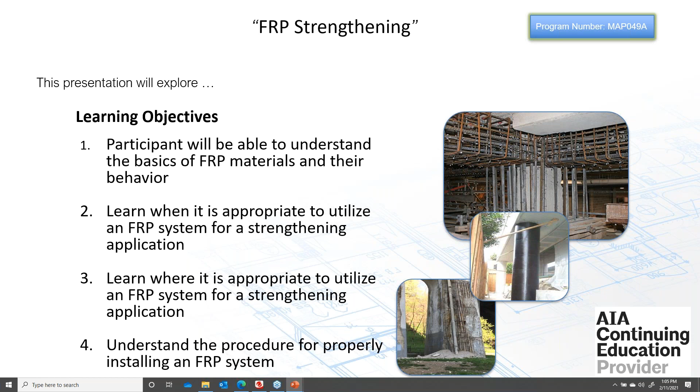Then we'll learn where it's appropriate to use these systems, as in flexural strengthening of beams, walls, etc. We'll kind of go through the different applications. And then Hamza will come on and walk you through some of the installation issues, quality control, things like that. So with that, I will jump right into it.

So really, when we're talking about FRP, we're talking about strengthening typically. Sometimes we use it for protection, but mainly we're talking about strengthening of existing structures. There are really four main reasons why we would be looking to strengthen a structure. The first is simply looking to increase the load-bearing capacity of that structure. So that could be due to a change in use.

So maybe you have an old warehouse that's being turned into apartments, and you need to increase the live load ratings for the floor. Or maybe you have an existing office building and they want to, say it's a law office, put in a library of books. So then you have that big heavy load that you need to account for. So you might have those new load conditions.

And then of course you could have design or construction errors. So either the engineer possibly under designed, which certainly happens from time to time, or there was a construction error. The bars were supposed to be at, say, 12 inches on center, or 25 centimeters on center.

The second reason, and certainly the biggest, is damage or deterioration. That covers a lot of different things, but mainly we're talking about corrosion. Corrosion is detrimental to the strength of the reinforcing steel as it corrodes and loses section area. You lose flexural capacity or shear capacity, whatever application you're dealing with. So we need to get in and replace that strength that's been lost. This is probably one of the more common reasons we'd be using FRP.

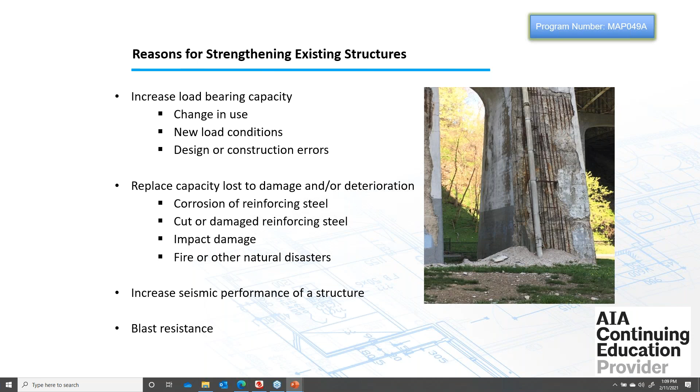The last one there, blast resistance, doesn't come up super often, but it's obviously a very specialized kind of engineering application. FRP materials are very effective to increase the blast resistance of structures, and certainly can be used if you have an application that would require it.

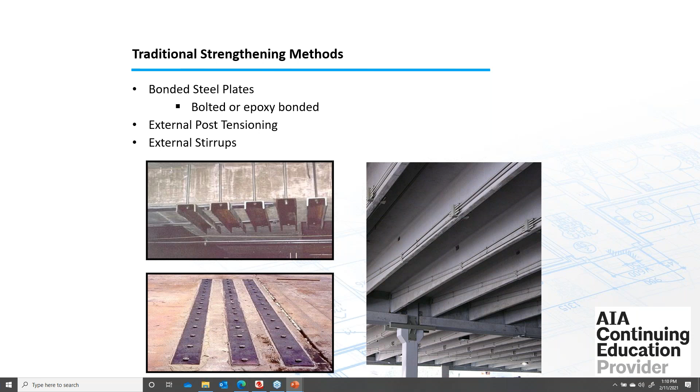The issue with some of these more traditional strengthening techniques is, one, they're very heavy if you're talking about steel plates, so you need a lot of big heavy equipment to get them installed. But the bigger issue is that you're almost always having to penetrate the concrete, either to put the anchor bolts in or just to fasten it in place. There are different reasons, but anytime you have to start penetrating or drilling into the concrete, there's a pretty good chance you're going to damage the existing reinforcing steel, which is just going to compound whatever problem you're already trying to fix. So if we can avoid that, it would certainly be advantageous to do so.

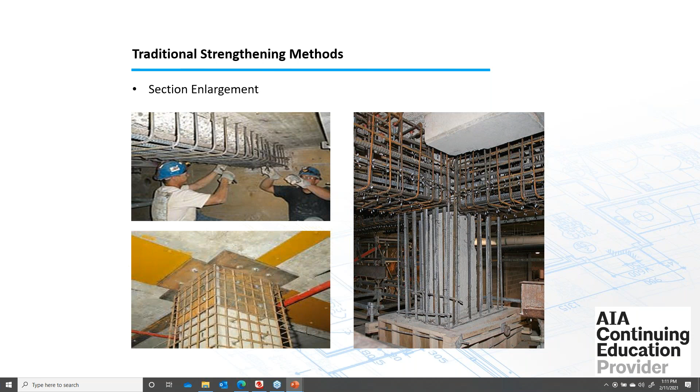With concrete, another real common way to do it is simple section enlargement. But again, you can see here they're making dozens and dozens of penetrations. You're also losing, if you're in a parking garage, generally speaking you don't have even an inch or two of overhead space to spare. So if you have to lower the beam by enlarging it, that's simply not possible oftentimes. Even in an office building or somewhere it may be possible, but in general, architects are not trying to give up much of their floor space if they can avoid it. So it's not necessarily the most desirable outcome that you might be looking for.

Minimal equipment is required. Everything you need can really be held in your hand. The surface prep equipment would be the largest—if you're sandblasting or something like that, you'll have some larger machinery. But oftentimes they're just using angle grinders and such, and Hamza will touch on that later. So really no big heavy machinery is required. A man lift, if you need to get elevated, but the actual tools themselves will fit in a small tool bag. So it's really, really convenient from that perspective.

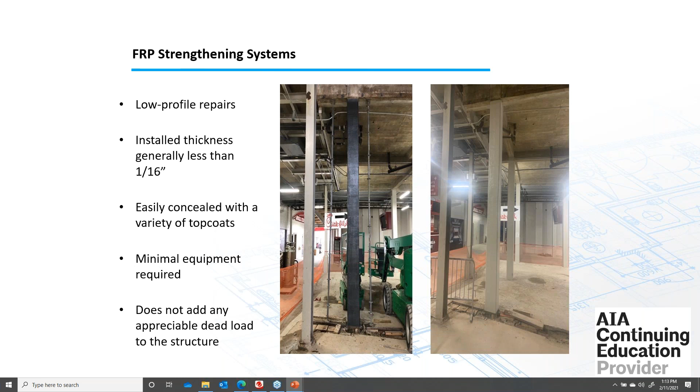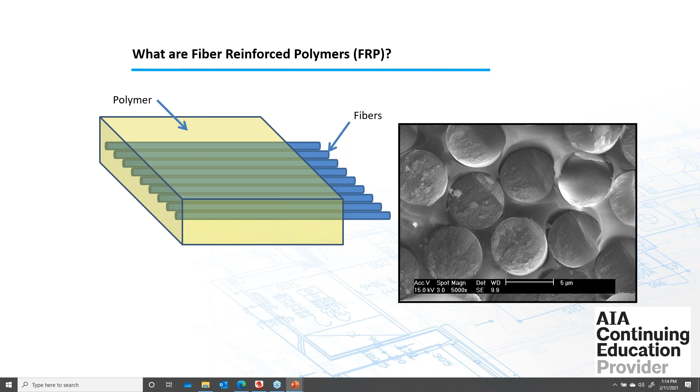So I keep saying FRP—FRP stands for fiber reinforced polymers. In the basic sense, you have some type of fiber, and those fibers are encapsulated in some sort of polymer, in our case an epoxy. The picture on the right is a magnified view of an FRP sheet. The little round, spherical-looking things you see are the actual individual fibers. Those get bundled up—if you've ever seen an actual sheet of FRP, there are little bundles of fibers that get woven together. So what we're looking at here is one individual fiber of that bundle. It's about 1/20th the size of a human hair in diameter, so it's very, very small. But as you'll see shortly, it's very, very strong at the same time.

The types of fibers used in the strengthening market for concrete—carbon is used probably 80 to 90% of the time. Anytime you have a true strengthening application under sustained load, you're going to want to use carbon. I'll get into that more in a second, but glass fibers are generally more applicable to something like a seismic event or simple protection. A lot of the DOTs will just wrap columns if they're out doing work on other parts of a bridge, just to give it some kind of belt-and-suspenders protection. You're not really loading it per se—it's just there to hold everything in place. We'll talk more about why that is in the next couple of slides, but keep that in mind.

And the last one, Aramid—most of you are probably more familiar with Kevlar from bulletproof vests. There are some manufacturers that sell Aramid fibers; we're not one of them. This material is incredibly tough—there's a reason it's used for bulletproof vests. Just cutting a sheet that's 40 centimeters wide, or about 16 inches, you're going to spend a good five minutes trying to cut through it with a pair of scissors because the fibers are just so tough. But really you'd only use it for something like a blast application, not for general flexural or shear strengthening. You wouldn't want to mess with the Kevlar otherwise—one, it's very expensive, and two, it's not very user friendly. However, if you're doing a really large blast strengthening project, it certainly would be something worth looking into.

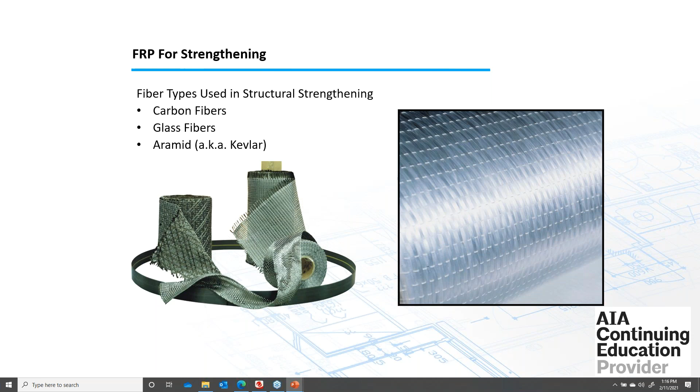So I mentioned we'll get into the benefits of carbon, and that's what we're going to do now. Carbon is very high strength and very high stiffness, much more so than glass, which is also very strong, but just not quite as strong as carbon.

And it has excellent durability and endurance characteristics. So when we put it through cyclic load testing, environmental exposures to chlorides and things like that, carbon really holds up much better than glass. It's also not very susceptible to creep, whereas glass is very susceptible to creep.

So if you're in say a mechanical room and you have a concern with sparks or something like that, there certainly is a fire hazard with carbon. And also the big thing to pay attention to is because it's conductive, if you put carbon directly in contact with steel, it's actually going to make the steel corrode because of dissimilar metals, and the higher nobility of the carbon versus the steel makes the steel corrode just from being in contact with a different metal. So we do different things to insulate and make sure that contact doesn't happen, but it's certainly something to pay attention to if you are going to have any contact.

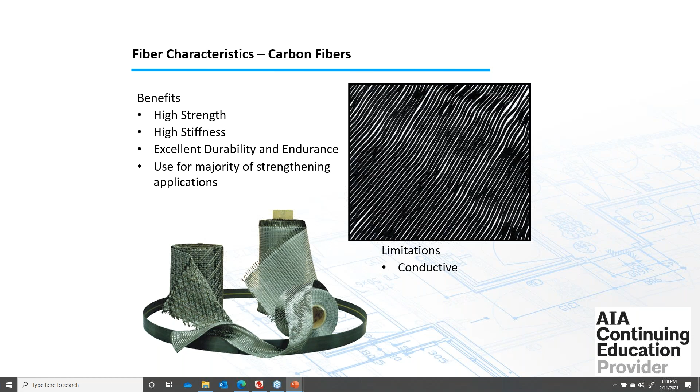This happens a lot if they're having to hang a steel plate for some reason, after maybe there was a drop tile ceiling or something, and they have to install the little hanger rods for the ceiling, or a plate on a beam, any number of different reasons. But if you do have metal in contact with the carbon, that's something we need to be aware of so we can address it. And it's very easily addressed - you can insulate it with epoxy. It's just something you have to pay attention to.

For the glass, again, it's also very high strength, especially for its weight. But it's about half as strong as the carbon. The big thing with glass is it's non-conductive, so we can use it as an insulating layer in those situations that I just described, if we need to.

It gets used primarily for single events, like a seismic event, an earthquake, where it's just going to take the load, and then after the event, you can go and inspect it, see if it's damaged at all, if it needs to be repaired before it gets another earthquake.

The reason for that is glass is susceptible to creep rupture. So as it's placed under constant load, it really starts to stretch and ultimately will rupture much more rapidly and prematurely than you would see from the carbon. So it's just really not ideal - it doesn't have that durability and endurance that carbon has. So we try to avoid it for flexural or shear strengthening, where it's just under constant load.

The exception to that rule would be for masonry, which we're really not talking much about today. But because masonry is much lower strength than carbon, sometimes putting carbon on it is actually too much stiffness for a masonry wall. So you would go and use the glass in that situation, just because it provides a closer amount of capacity to what's already there.

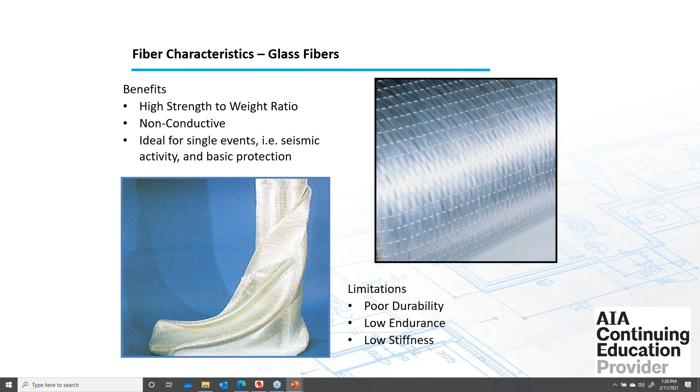For the polymers we use to encapsulate these fibers, there are thousands of different polymers, but all FRP manufacturers are using epoxy. We use epoxy because it has very similar properties to concrete as far as stiffness and flexural capacities go. It just lines up the best, and it also adheres exceptionally well to the concrete.

Of course, the one downside is epoxy has absolutely horrible fire endurance, so you're going to lose the FRP system when it's exposed to a fire. We'll get into that a little bit later on.

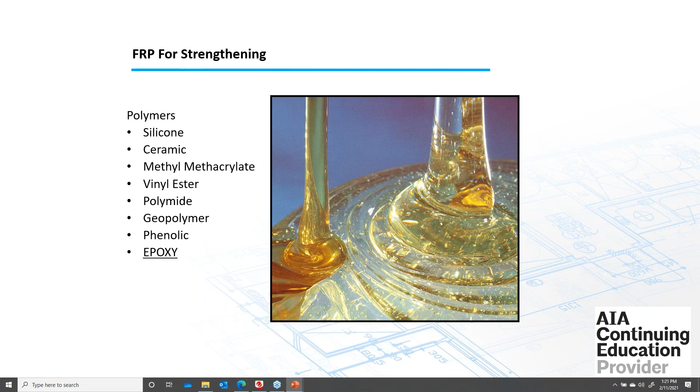So just comparing some of the different products, I put some of the more traditional weights of fabric that you'll see. All FRP products in the market are designated by a weight. The two most common are 9-ounce or 18-ounce carbon, which is 300 grams per square meter or 600 grams per square meter.

More recently, we've seen some heavier fabrics coming out, and we have one as well. I've got a typo there, I apologize - it should be 1,200 grams per square meter on the third column, or 36 ounces per square yard. Essentially that's 4 layers of the lightest one combined into one layer. You'll see those used here and there, but you can't really double up the layers too much. You're probably limited to 1, at best 2, layers of that really heavy weight, the 36 ounce or 1,200 grams per square meter.

The glass typically weighs around 900 grams per square meter, or 27 ounces per square yard. But you can see the design thicknesses are very, very low profile, very thin - 2 hundredths of an inch. This is the cured thickness with the epoxy, so half a millimeter, 2 millimeters - we're not talking much thickness at all.

But when you look at the strengths we're seeing, the tensile strength is around 1,500 megapascals, around 210 or so kips per square inch for most of the carbons. The glass is much less strong than the carbon, but still pretty good considering it's only 0.07 or 2 millimeters thick.

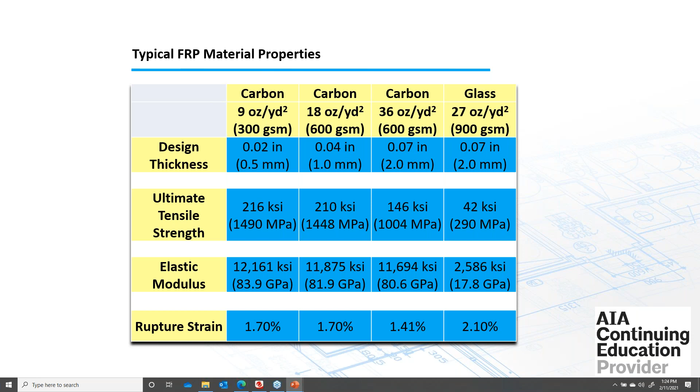Now, we never are able to achieve the ultimate tensile strength of the material, and I'll explain why here in a few slides. That's why the ultimate tensile strength is really not all that important, because we'll never get there - it's going to delaminate before that happens. So just to point out the difference between steel and FRP: it is linear elastic all the way up until its failure point.

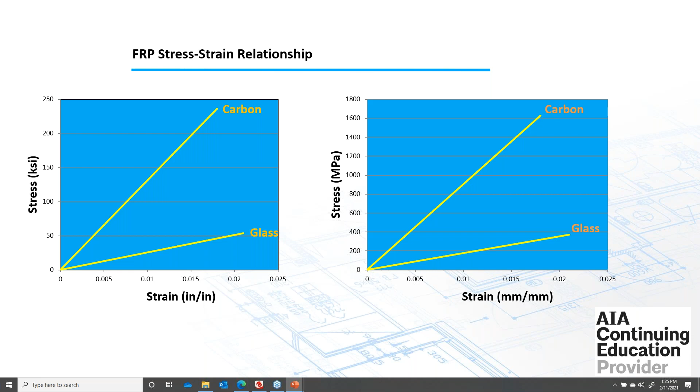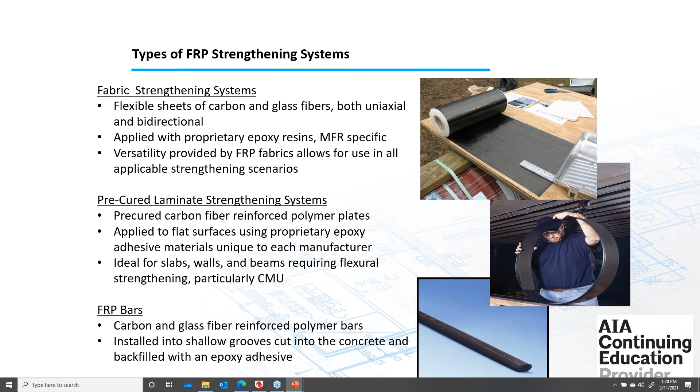Then there's the FRP bars. These are carbon or glass typically. We'll apply these by cutting a shallow groove into the concrete, what we call a near surface mounted application, where you imagine if you have say a parking garage and you've got a negative moment issue right in the drive lane. Well, we can't put a plate or a strip of fabric on the top of the concrete where cars are going to be driving over it - obviously that's going to damage the system. So with the bar, you can actually cut a small groove into the concrete and kind of internally reinforce the concrete, so you're protecting the FRP from pedestrian or vehicular traffic.

So now we'll get into some of the design stuff. First thing you need to do if you're looking at using FRP is to check the strengthening limits. I mentioned the fire issues with FRP - because you can't fireproof FRP materials, you have to make sure there's a baseline capacity that you can meet.

So in the 440 code, the CSA doesn't have a direct equivalent equation to this, but in the next slide they do have a statement that for fire applications is basically saying the same thing - that the existing structure without any strengthening has to be able to carry the service loads on its own. And then if it meets that, but it simply can't meet the 1.2 and 1.6 safety factor loads, the ultimate loads, then that's what we're using the FRP for, is to get you from the service load up to the ultimate loads.

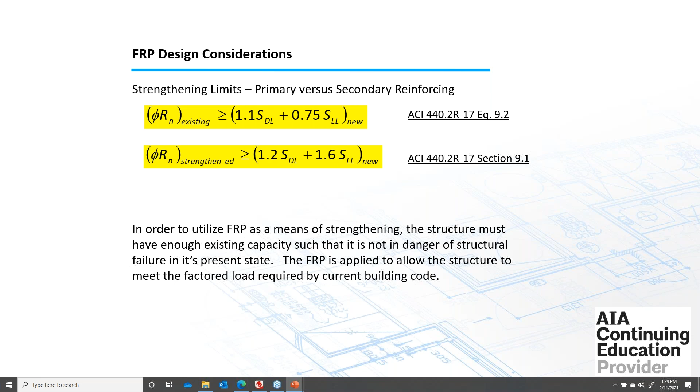If you can't provide service loads with the existing structure and you're going to be relying on whatever system you use to strengthen it, you actually cannot use FRP. That is particularly true in fire situations. So when you're dealing with fire, there's actually a separate equation in 440 where it's just 100% of the service load. If you don't have fire issues, they give you a little more flexibility, but if you have a fire rating that needs to be maintained, then this is the equation that you need to adhere to.

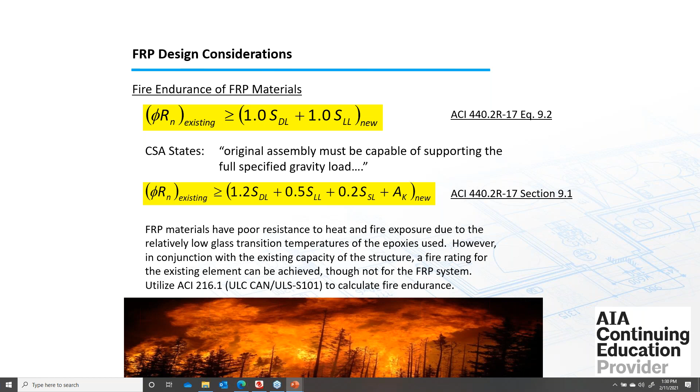In the CSA, they don't have an equation, but it has the statement that you can read there: the original assembly must be capable of supporting the full specified gravity load. So again, it's basically saying the same thing - if it can't carry the loads, if you're in a collapse situation before you put the FRP on, you should not be using FRP, because there's no way to fire protect FRP. You can maintain fire ratings and use FRP, but you can't actually fire protect the FRP itself. It's going to burn and be lost generally in about 10 to 15 minutes in the event of a fire. So both the CSA and the ACI guidelines address that and prevent you from using FRP in situations where it would be required as a primary load carrying member.

So we'll go through now some of the applications and some of the engineering associated with that.

If you imagine a beam or a slab, we can do flexural strengthening for positive bending on the underside. Imagine we've got just a gravity load - this could be a beam, a slab, whatever, it's going to bend. So we're just putting the material on the bottom side. That's very important: the material always has to be placed on the tensile face of the concrete. It can't be placed on the top in this situation because that's the area of the beam or slab that would be in compression. With FRP materials, they're only able to assist in tension. They don't provide any compressive capacity, with the exception of a column, which is different because you're putting the material in tension. But in this case, you'd be actually compressing the fabric.

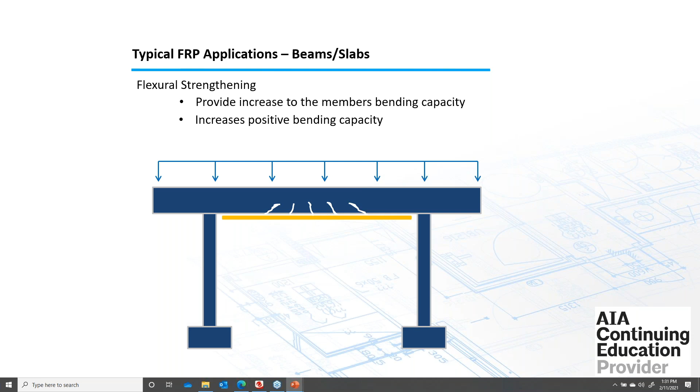If you just take a piece of paper and crumple it up, obviously there's no resistance when you do that. FRP is exactly the same. So the material always has to go on the tensile face of whatever member you're strengthening.

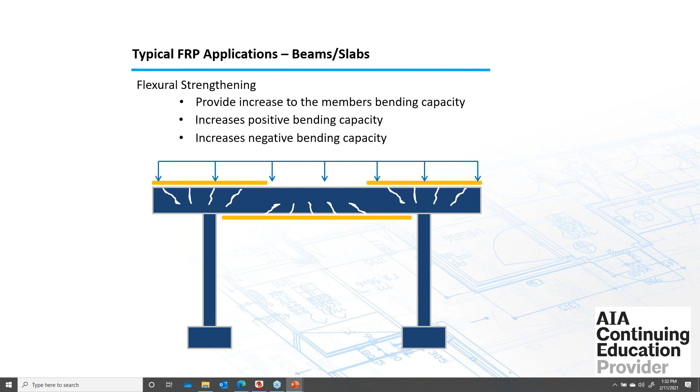So when we do negative moment strengthening over the supports in this example, the material does have to go on the top, because that's our tensile face. With a cantilevered member, the material would need to be on the top, obviously. Whatever the tensile zone of the member you're strengthening is, that's where the material needs to be placed.

In a situation like a moment reversal - like if you had a blast down below, or on a project where you had a cantilevered slab that was deflecting, so they decided to shore it up permanently with a column and then turn it into a simply supported member - now you're reversing. Again, you always have to make sure that you get that material placed on the tensile face of the concrete.

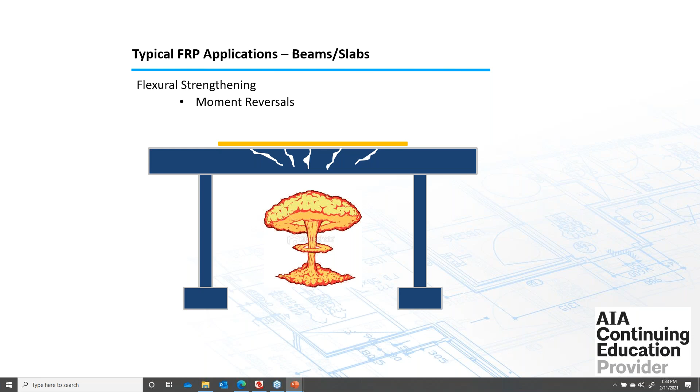This question comes up a lot, especially from contractors. If they're on a job site and you've specified that it goes on the underside because that's where it needs to be, but they see all the HVAC pipes and ducts and everything else, they think to themselves, geez, it'd be a lot simpler if I could just put this on the top. So they'll ask the question. Unfortunately, the answer is no. They have to get around those obstructions, because the material is not going to provide any benefit when you place it in the compression zone.

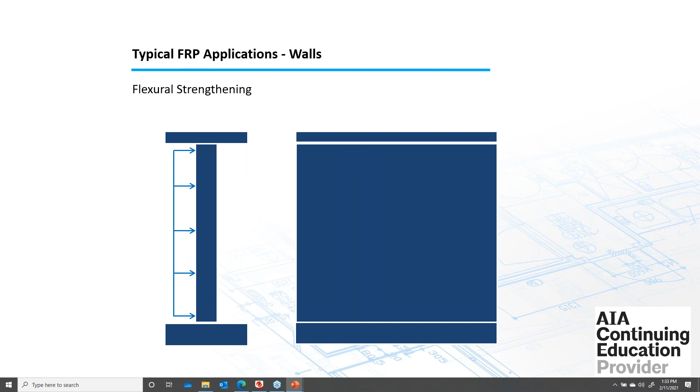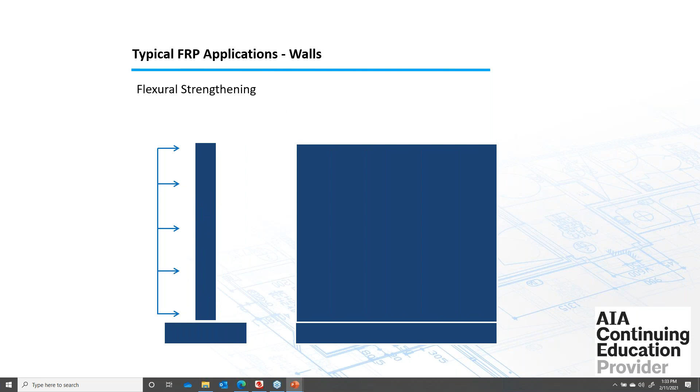It works the same way for walls as well - again, tensile face. If you've got bending of a simply supported wall, it's going to go on the opposite face of the loading. If you have a retaining wall with maybe a soil load on one side, you have to put it on the face where the bending is expected to occur. So with a retaining wall situation, yes, that does involve having to dig out around the wall, place the FRP, and then backfill afterwards. So again, it's very important that we know where the tensile face is and that's where the material has to go.

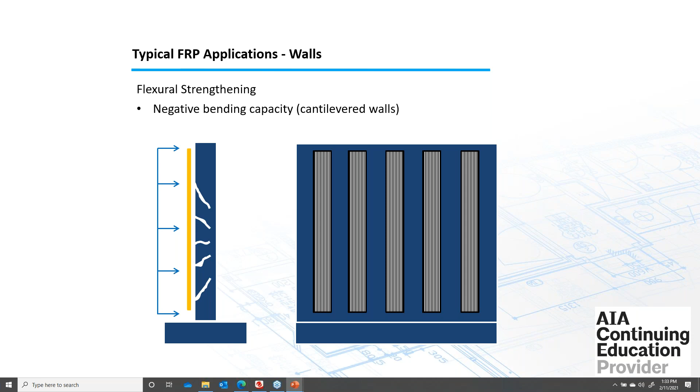So just some general rules of thumb as it pertains to flexural strengthening: we can do it for really any type of concrete - lightweight concrete, traditionally reinforced concrete, post-tensioned concrete, prestressed. It doesn't matter - if it's concrete, we can strengthen it.

There are some differences in how we approach the actual design of the FRP when we're looking at, say, a post-tension system versus just traditionally reinforced. There are some different design equations in the CSA and ACI guidelines, but you can still do it.

If you get into any kind of moment redistribution - I know ACI allows that, and I'd assume CSA also does, though I'm not super familiar with CSA's building codes - there are some limitations on moment redistribution when you're using FRP. It used to state that the effects of FRP weren't known, so just proceed with caution, which was kind of a waste - it flagged the issue but said they couldn't help you with how to handle it. Fortunately, they've changed that now, at least in the ACI 440 document, and they give you specific equations on how to reduce the amount of moment redistribution you can take advantage of when using FRP. So it's certainly something to pay attention to if you're doing FRP strengthening but also using moment redistribution to try to reduce the amount of strengthening that you need.

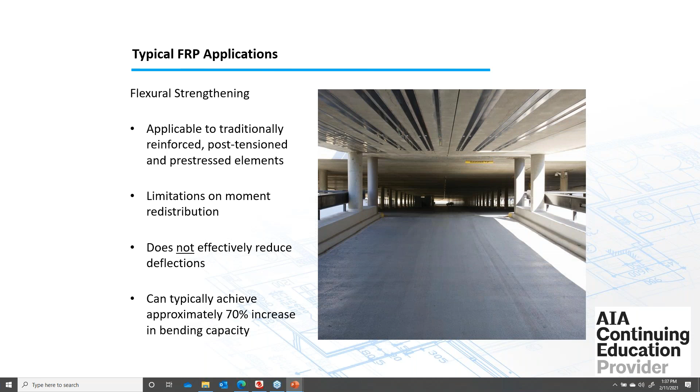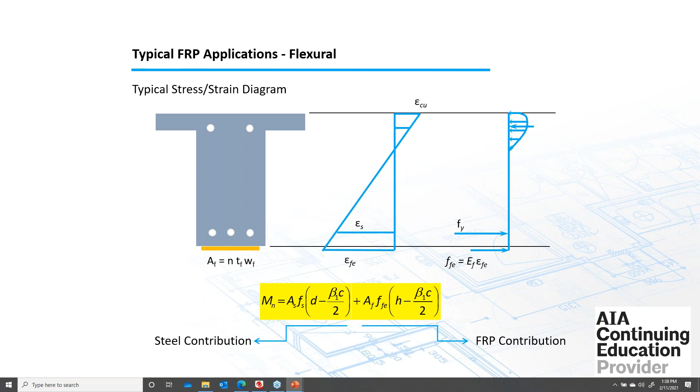FRP is really designed in the exact same way, except we have the area of the FRP as opposed to the area of the steel. Then we have the effective stress in the FRP as opposed to the stress of the steel. And then we have the neutral axis location of the FRP as opposed to the neutral axis location of the steel. So it's really no different than what you're used to doing, just different materials and different material properties.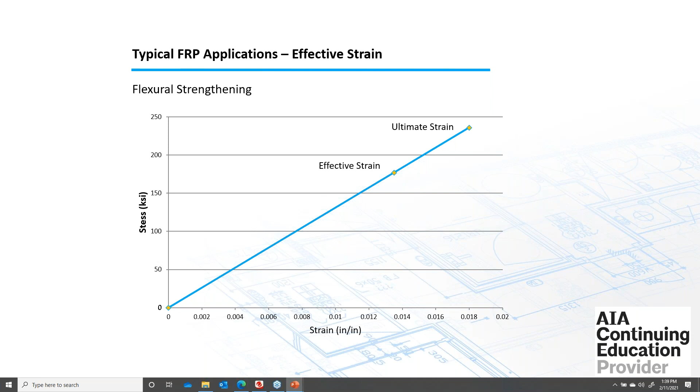Now, as far as that 70% limit, why is there a limit? Why can't we just continue to put more material on and get more strength? The reason, as I mentioned before, is that we can't ever get to the ultimate strain or stress of the material - it's going to delaminate at some point prior to that. So the way the guidelines handle this is they've come up with this debonding strain, or effective strain, that gets calculated based on these equations here.

They're the same in CSA and ACI. The only difference is for the metric units versus the US customary units. But you can see here it really depends on the strength of the concrete, F prime C, the compressive strength. And then on the bottom you've got N, the number of layers of material, then the stiffness times the thickness of that material. So as we increase the number of layers, this allowable strain starts to converge on zero.

Generally, with your standard 600 grams per square meter, that's the 18 ounce per square yard material, around 3 or 4 layers you start to get to that zero strain. So adding 5, 6, 7 layers is going to add a very, very small amount of additional capacity - it's really negligible. So it doesn't make sense to spend that money adding more and more layers to get essentially no return. That's where that upper limit comes from, and that's to prevent the material from delaminating due to overstress.

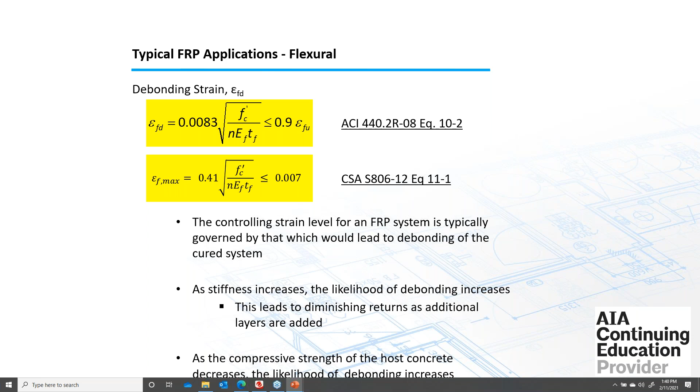So that's where that upper bound comes from, as far as 3 or 4 layers or the 70% kind of max for flexural capacity. For shear strengthening, there's either in-plane or out-of-plane shear strengthening.

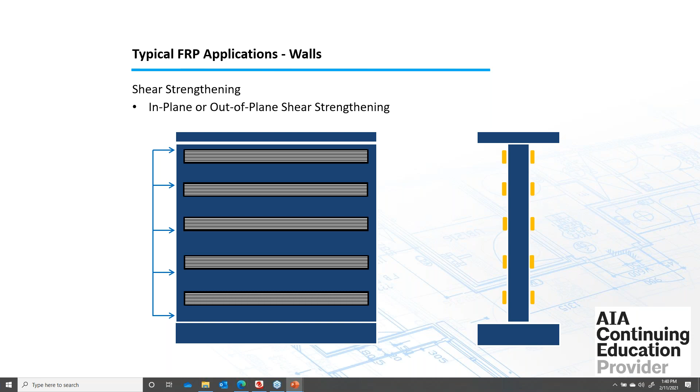The material can be used for both. Which direction you run it obviously is going to depend a little bit on what's the direction of the shear being placed on the wall.

There's different requirements as far as the thickness of the wall. For 4-inch walls and 6-inch wide walls, you can get away with putting the material on just one side of the wall. If it's 8 inches or wider, then you have to actually put the material on both sides of the wall. That all comes straight from the ACI guidelines.

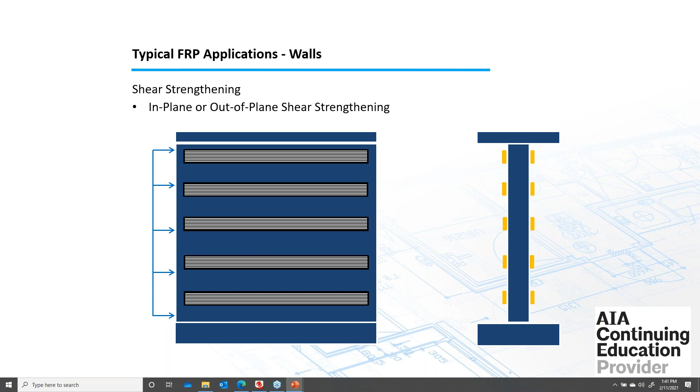I'm sure there's probably a similar requirement in the CSA as well, as far as which sides you need to place it on. But generally, anything 8 inches or wider, which I believe is 200 millimeters, you need material on both sides.

If you have any overturning going on, if you need force transfer into the slabs to help tie everything together, you can do that with a steel angle bonded to the FRP, and then you would anchor that angle down into the concrete.

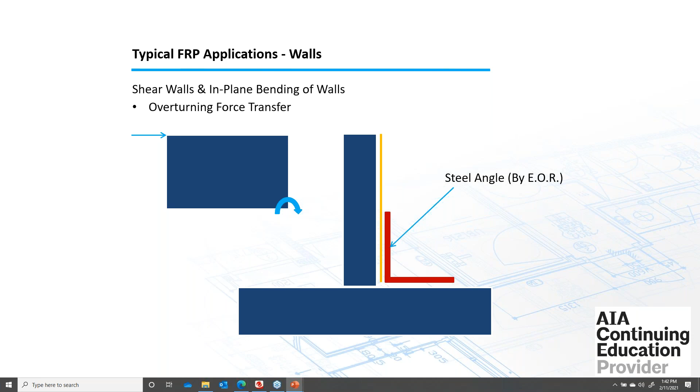This would be a great example of when I was talking earlier about the conductivity of the carbon and having to pay attention to that. This is a prime example. In this case, we would want to either put a piece of fiberglass in between the carbon and the steel angle, or just make sure we put in a lot of extra epoxy to ensure there's no contact between that carbon and that steel, so we don't get a corrosion cell starting and corroding the steel plate that you're relying on. Good example of that.

Shear strengthening of beams: typically we use what we call a U-wrap, because it's shaped just like a U, pretty self-explanatory. You can also do just on the sides, or you can wrap all the way around. There's varying effects. If you can wrap all the way around the member, you get the biggest return, the largest increase in capacity.

But obviously you can't often do that because there's a slab or something. We generally don't just build beams for the look of the beam. Sometimes architects do that, but not very often. So usually you can't wrap all the way around it, which is why we do the U-wrap.

But then there are instances where maybe there's a steel plate already installed on the bottom, or you've got obstructions of some kind and you just can't wrap underneath and around. In that case, you can actually just put the material on the sides only, but you do get a further reduction in the capacity provided when you do that.

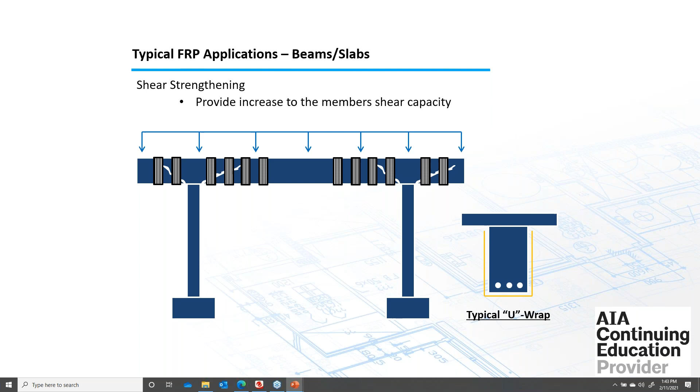So if you have an obstruction, don't just say, oh, I can't use FRP because I can't get a U-wrap. That's not the case. It's just that you get a reduction in capacity provided by the FRP. Again, similar to flexural, any type of concrete is fine.

Beams, walls, shear diaphragms, if you're in a seismic region, FRP is great for that. There are some really good guidelines in both the CSA and the ACI for seismic applications. You can expect generally about 2 kips per inch of beam depth or wall depth as far as how much capacity you can get, which is 3.5 kilonewtons per millimeter for our Canadian friends.

So a 30-inch deep beam, you can figure about 60 kips of shear capacity that you'd be able to get. It's not a hard fixed number, but it's a rough approximation if you're in the preliminary stages of a project and just trying to explore your different options. If it's 30 inches deep and you're trying to add 200 kips, there's just no way we could get there, because of that delamination equation, the delamination strain.

And then lastly, FRP systems are not effective for punching shear. So if you have a punching shear issue—anyone not familiar with that—it's if you have a column being supported on a slab, and because of that concentrated load, it wants to punch through the slab. So they will put a thick area, what we call a drop panel or a thickened area of the slab, underneath where the column is.

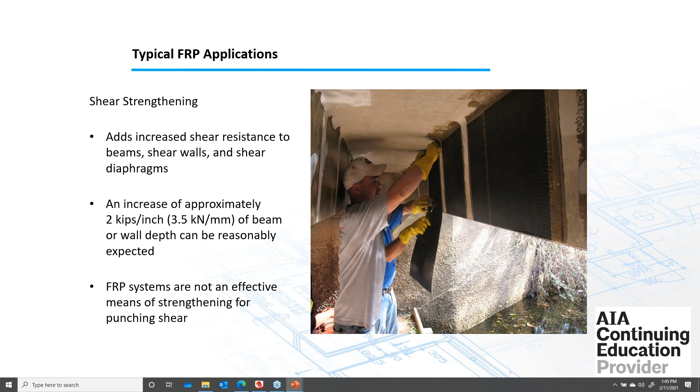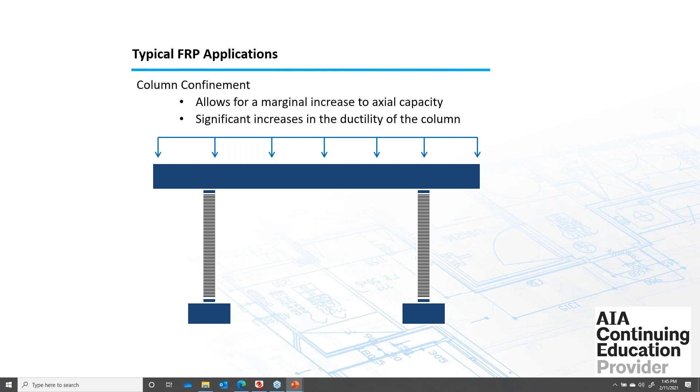Then the third kind of main application we'll see is just column confinement. So that's just wrapping around the column like we see here. Really you get a marginal increase in axial capacity of that column, but you really get significant gains in ductility of the column, which is why it's so great for seismic strengthening.

The equations from both the CSA and the ACI are very similar, just a little bit different factors for the CSA versus the ACI. But the way you do it is you calculate a confining pressure that the FRP provides by wrapping around it, and then you use that pressure to calculate the additional compressive strength that you're providing.

Now, it's not much. On a round column, you're going to get somewhere probably around 100 psi, anywhere from 50 to 100 psi of additional capacity per layer, which is not much. So if you've got a column where you're looking to get additional capacity, if you're tripling or something, you're adding a ton of weight, you're probably not going to get there with FRP.

The difference with columns versus flexural or shear is it is not what we call bond critical, so there is no delamination concern. So you can actually use 100 or 200 layers of FRP. In theory, you could get any load you wanted to, but it's going to be way too expensive when you start talking about that many numbers of layers. So while you can get some increase, it's not the best way of adding compressive capacity to the column.

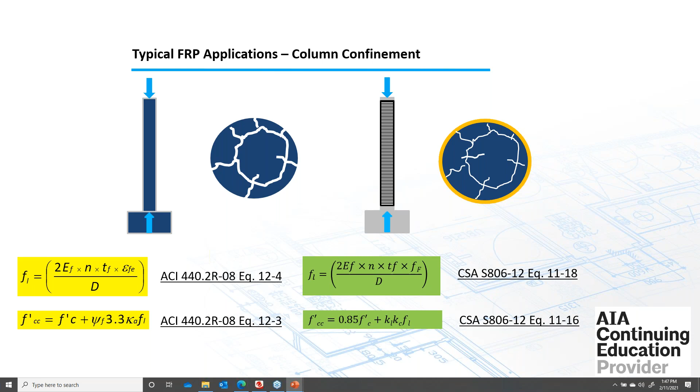Another thing a lot of the DOTs are doing, as I mentioned before, is they're just wrapping. If you're up in the north where they're dropping snow and salt everywhere for the snow and ice, you get a lot of deteriorated columns from the plows going by and blasting them with all the snow and the salt. So you get a lot of spalling and cracking. The DOTs are using it just as a layer — they'll throw a layer or two of glass around the column, not really for any load carrying capacity, just to help hold it together and maybe extend the service life of the column out a little bit longer.

Here's an in-practice view of that. This is a double column, so you can see there's a column and then another column immediately adjacent to it. There's probably only an inch or two in between those columns, about 50 millimeters or so, which is really all the room you need to actually install the FRP. If you can fit a paint roller in the space, you've got enough room to install a system. So really, really versatile material as far as the installation side, which Hamza is going to get to here in a second.

You can do confinement for square columns — obviously we're showing one here. There are limits to that. I'm not sure what the CSA is, probably similar, but in the ACI, the limit is the side aspect ratio has to be less than 2, which means no one side can be more than 2 times larger than the other side. So if you had say a 36-inch by 12-inch column, you can't confine that with FRP. You'd be limited to a 24 by 12, or if it was 36, the other side would have to be 18 inches — pretty simple math.

And then no face can be larger than 36 inches. So if it's a 4 by 4 foot square column, that's actually too large to wrap or confine with FRP — you're limited to a 3 foot. Now with a round pipe or a really large column, it can be as large as you want. I mean, we've wrapped tanks that are probably 200 feet in diameter. But this is just, the limitations only apply to square or rectangular columns.

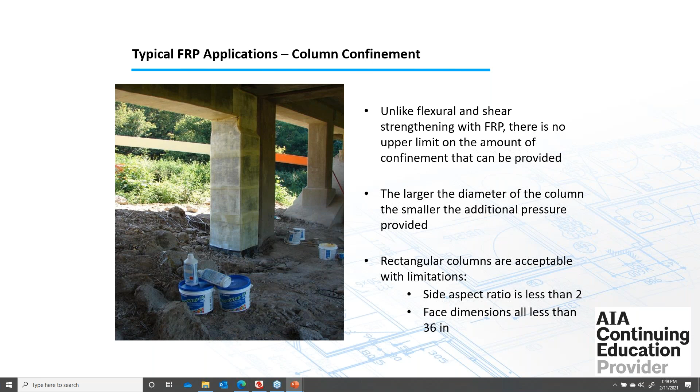Then we've just got slab openings. I talked about this at the beginning, where maybe you're cutting a hole in the slab, you cut some steel. We're just replacing that cut steel with the FRP. It also helps control cracking at the corners there.

So oftentimes, even though the bars are just running in one direction here, we would actually run material perpendicular to the bars also, just to help control cracking at that re-entrant corner. It's certainly a good idea to do that. But again, the material needs to be placed on whichever side the bar was.

So I showed top bars here. So if we cut a top bar, we need to replace the material on the top of the slab. If it was a bottom bar, we'd want to place the material on the bottom of the slab or the beam, whatever it may be.

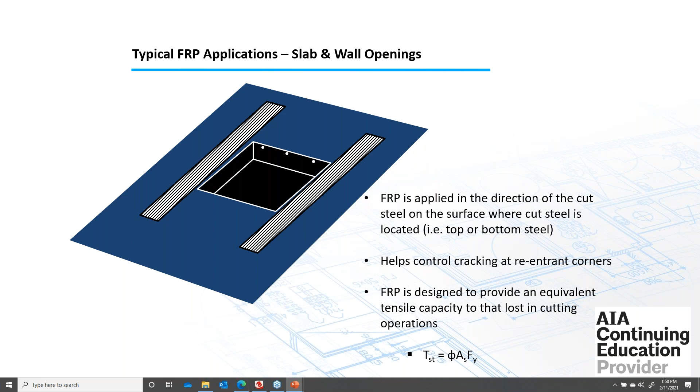Perfect. Thank you, Brian. Always a pleasure to hear you sharing your knowledge about FRP. So my part of the presentation consists of detailing and illustrating key steps of FRP systems installation. We will see together, for probably 10 to 12 minutes, preliminary steps prior to application, surface preparation requirements, application of products of each system, and some quality control hints.

So before installing the selected FRP system, all unsound concrete must be removed and repaired per ICRI guidelines using appropriate concrete repair material and methods. If there was corroded steel rebars, it is highly suggested to expose them, clean them, and protect them against future corrosion using appropriate solutions such as galvanic anodes or corrosion inhibiting coatings like the blue one we see in the middle picture. Once repair material is applied, adequate time must be provided for the repair to fully cure.

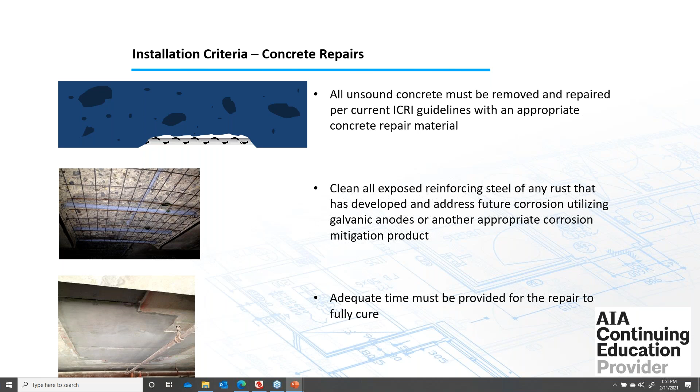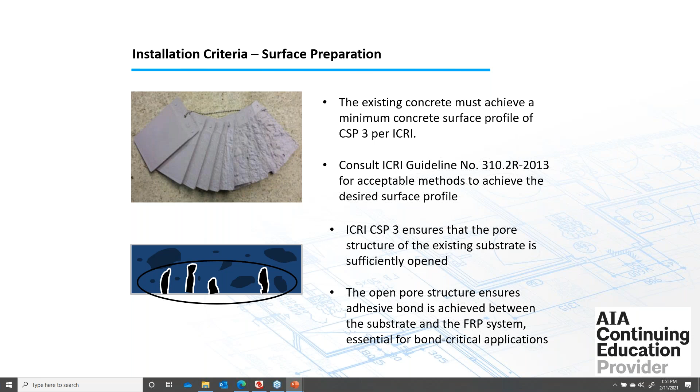The existing concrete must achieve a minimum concrete surface profile of CSP3 per ICRI. The CSP3 will ensure that the pore structure of the existing substrate is sufficiently open to ensure adhesive bond between the substrate and the FRP system, which is essential for bond critical applications such as flexural strengthening.

You can consult ICRI guideline number 310 for acceptable methods to achieve the desired surface profile. One of the most used ones for vertical and overhead applications is sandblasting to CSP3. As you can see in the pictures, sandblasted concrete showed open pores and made many cracks evident.

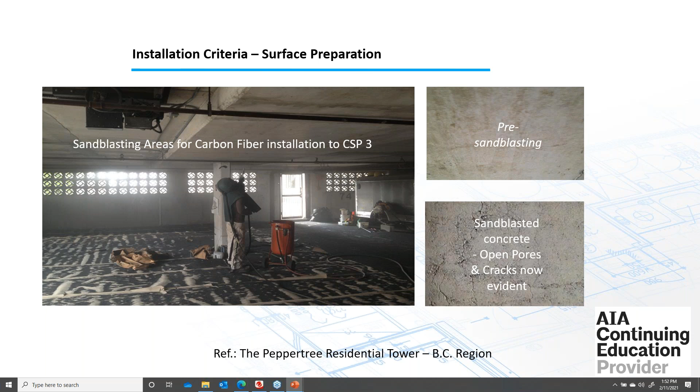If the FRP fabric is to wrap around any corners, a smooth transition must be created and provided to avoid concentration of stress. The minimum radius accepted is 3/4 inch, so about 19 to 20 millimeters, but the design engineer may have to increase the radius for heavier fabrics such as the 1200 grams per square meter.

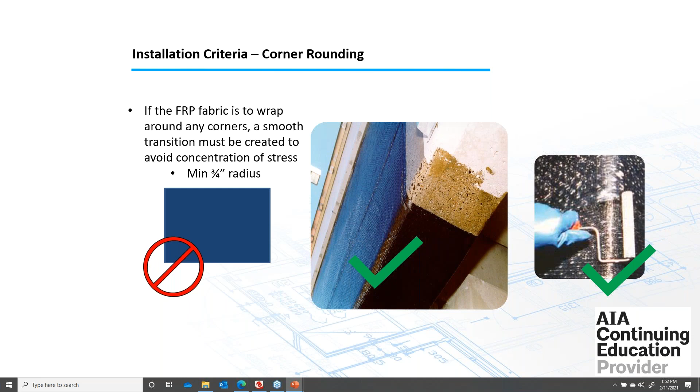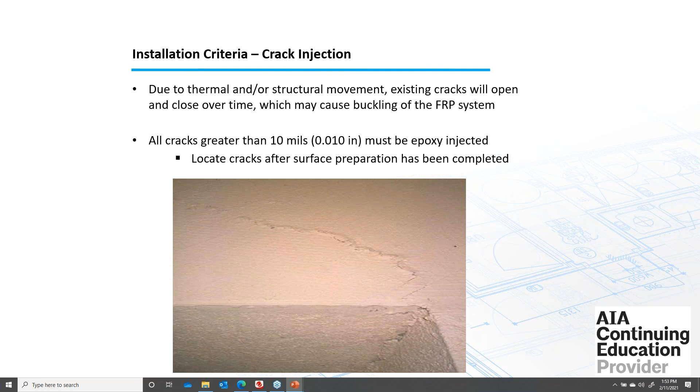Due to thermal and/or structural movement, existing cracks may open and close over time, which may cause buckling of our FRP system. So all cracks greater than 0.3 millimeters, so around 10 mils, must be epoxy injected. The cracks could be either injected under pressure or filled with epoxy by gravity feed, as we can see in the picture.

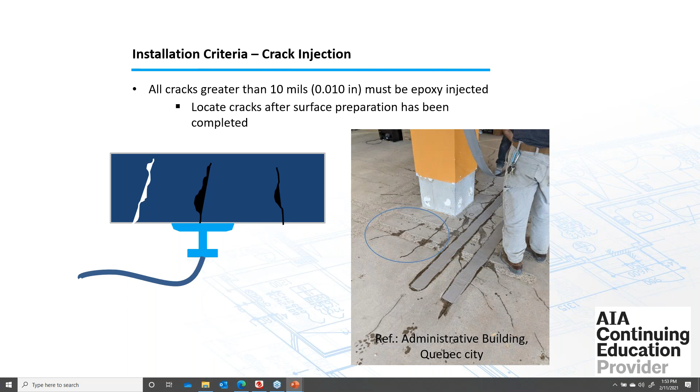The FRP system must only be installed under the appropriate environmental conditions. First, ensure that the expected temperature range falls within the acceptable installation tolerance for each epoxy component. Typically, the range is between 5 to 32 Celsius degrees, so between 40 to 90 Fahrenheit.

Second, the FRP system must be installed on a dry substrate. Be sure that the surface pores of the substrate are not saturated with water or moisture prior to installation. For that, you can measure the moisture content using ASTM F2659. If the result is under 4%, you're good to go.

If it's above 4%, you have to consult the manufacturer or try to work something out with the engineer of record to fix that. You also have to identify and address any source of potential leaks that could allow the accumulation of moisture behind the installed FRP system, as this may lead to delaminations or blistering. Also note that the temperature of substrate must be superior to the dew point by 3 Celsius degrees. This step is actually a critical checkup to do, especially for exterior applications.

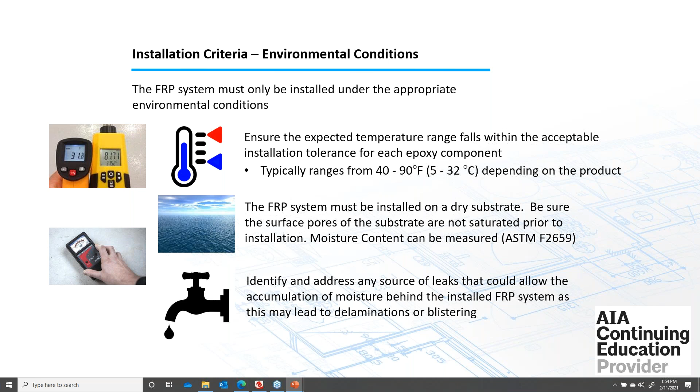Now let's go through application steps of FRP systems, starting with FRP fabrics. So the FRP fabric system looks like this. We first have the primer to consolidate and seal the surface of the prepared concrete. Then you can use the epoxy putty to level the surface. And then we have the FRP fabric impregnated with the appropriate saturating epoxy. And then if you want to hide or protect your FRP system, you can sand broadcast and apply a top coat or another material on top.

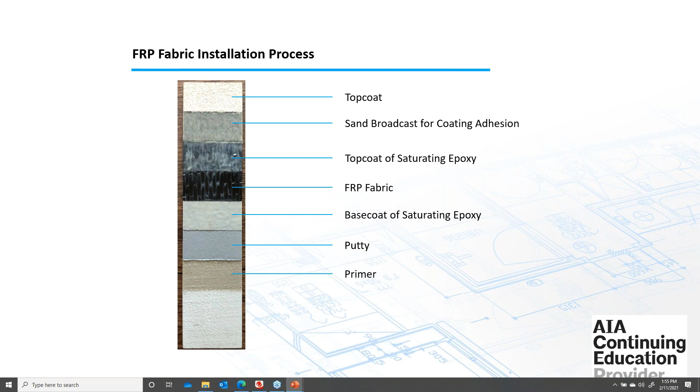Due to the fast setting nature of the epoxy materials involved in the FRP system, the fabric should be prepared prior to mixing the epoxy components. So the contractor has to cut the strips to the required or designed length and width using a sharp tool. Also keep fabric clean of dirt and contaminants, and always avoid folding or creasing the fabric.

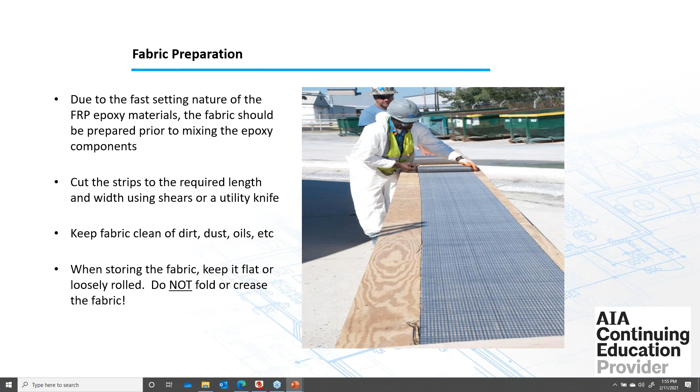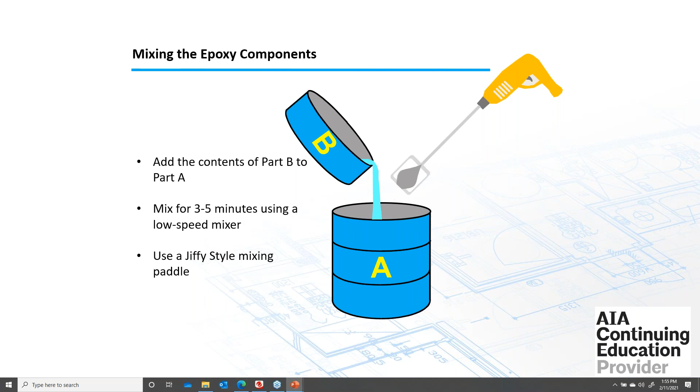When mixing the epoxy components, try always to add part B to part A. Mix for at least 3 minutes using a low-speed mixer, and ideally use a Jiffy style mixing paddle for most of the epoxies. Also select the appropriate tool for each component to apply it.

For example, the primer, which is very fluid, can be applied using a paint roller, and the epoxy putty, which is much thicker, will require a trowel or a spatula. Coverage rates are provided on each relevant technical data sheet.

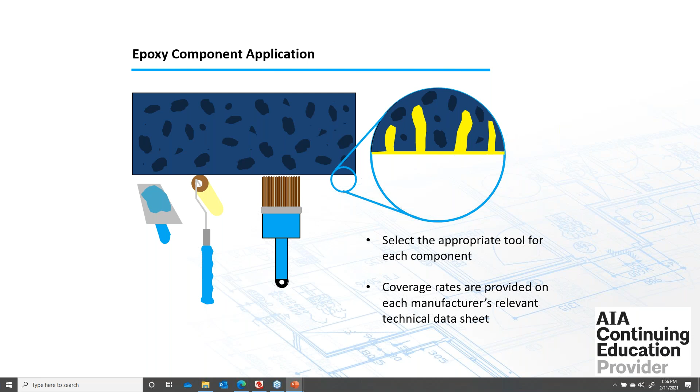Here is a summary of the FRP fabric installation procedure using the dry layup method. We will see another method in a few seconds. The first step is to apply the primer component, which you can see in the brownish zones in the pictures.

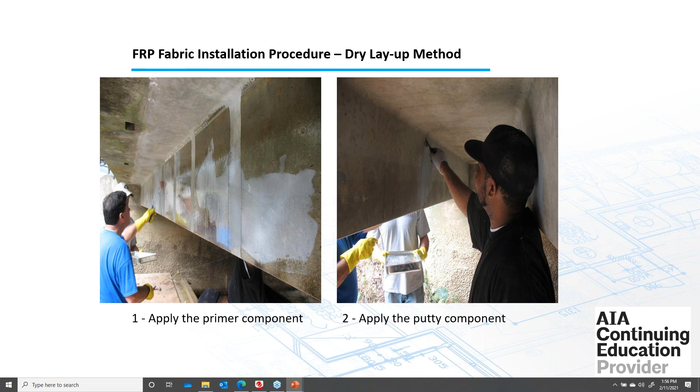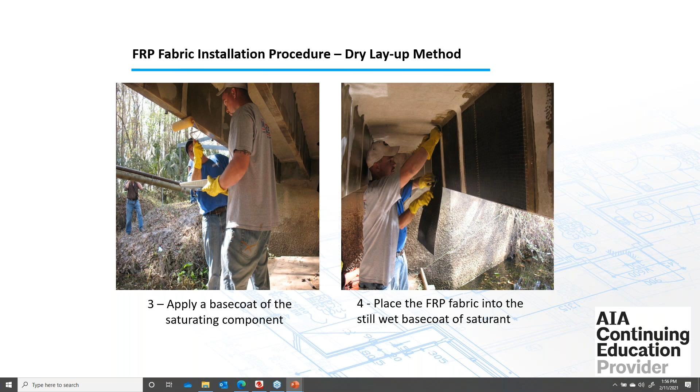The second step is to apply the putty component to level all the surface or only irregular surfaces, as you can see in the two pictures. The third step is to apply the first coat of the saturating component, then place the FRP fabric into the still wet base coat of saturant. After that, you can roll the FRP fabric to remove wrinkles and achieve a tight installation, and finally apply a second and final top coat of the saturating epoxy component.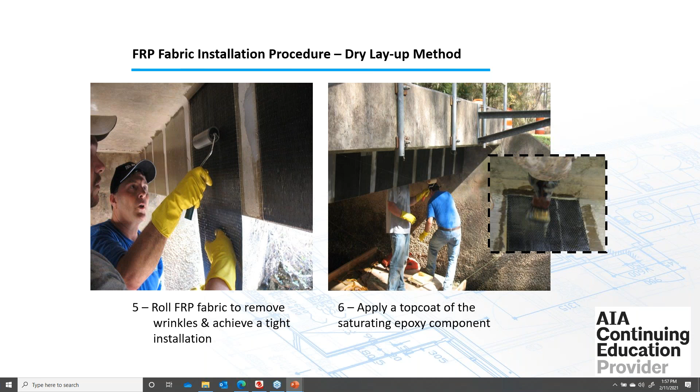The wet layup method is slightly different. In the wet layup method, the saturating machine is used to pre-wet the fabric prior to placement. The purpose is full impregnation of heavy fabric fibers using a low viscosity epoxy, but the technique could also be used for regular fabrics.

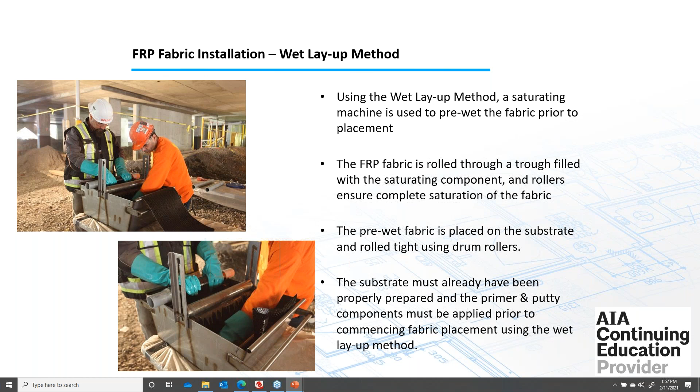The FRP fabric is rolled through a basin filled with the saturating component, and the rollers ensure complete saturation of the fabric while removing excess epoxy. The pre-wet fabric is then placed on the substrate and rolled tight using drum rollers.

Obviously, the substrate must already have been properly prepared, and the primer and putty components must be applied prior to commencing fabric placement using the wet layup method. In this job, the contractor preferred using the wet layup method instead of the dry layup because he felt more productive with it, even though he had the choice to use the dry layup method.

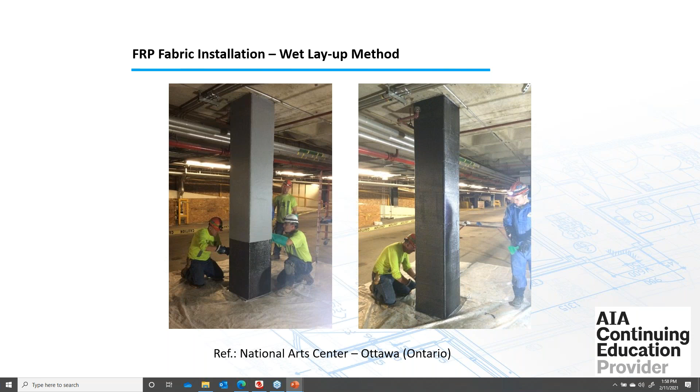If the FRP system is exposed to UV, a top coat must be applied to protect the system. It may also be required indoors for aesthetical purposes, so the engineer will reinforce his column and the architect will want to hide it with acrylic paint or something like this, so we can hide the structural intervention.

For that, the contractor has to broadcast sand to refusal into the final top coat application of the saturating component and allow it to reach a tack-free state before applying the top coat material.

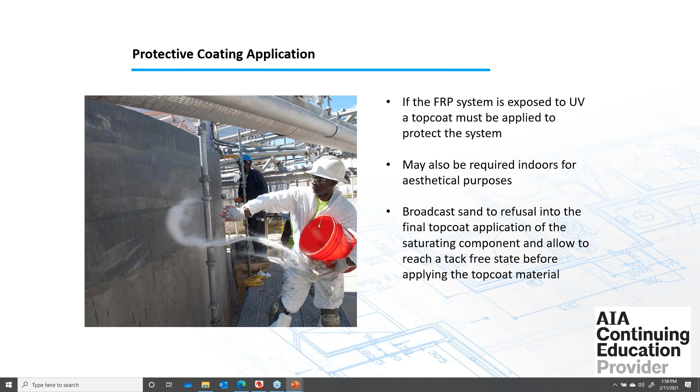In this bridge, the FRP intervention was protected against UV using a special acrylic coating, and the public can barely notice the intervention.

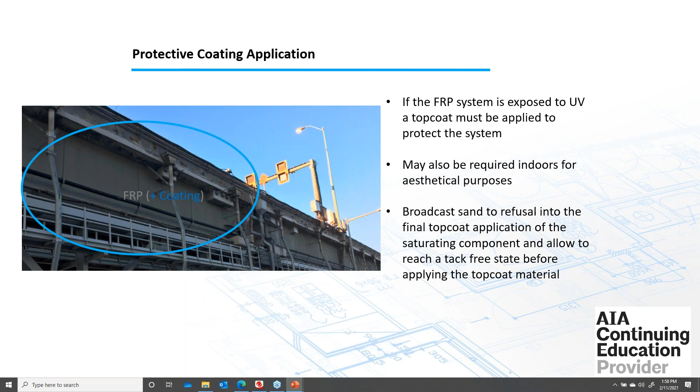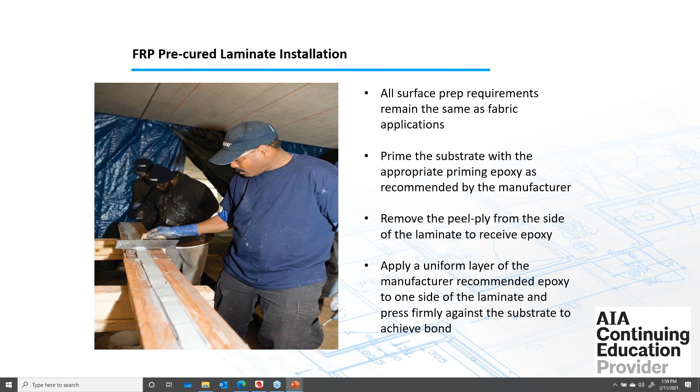For the FRP pultruded laminate installation, or the CFRP plates, the surface preparation requirements remain the same as fabric applications. We still have to prime the substrate as recommended by the manufacturer. Then remove the peel ply from the side of the laminate to receive the epoxy, and apply a uniform layer of epoxy adhesive to one side of the laminate.

Also add a layer of epoxy putty on the concrete substrate, then press firmly against the substrate to achieve bond using rubber rollers or an equivalent hard tool.

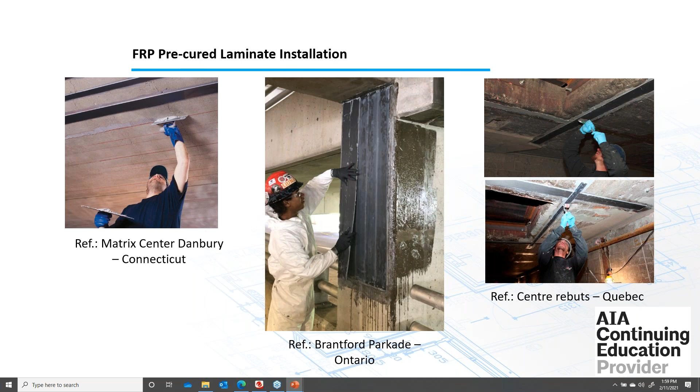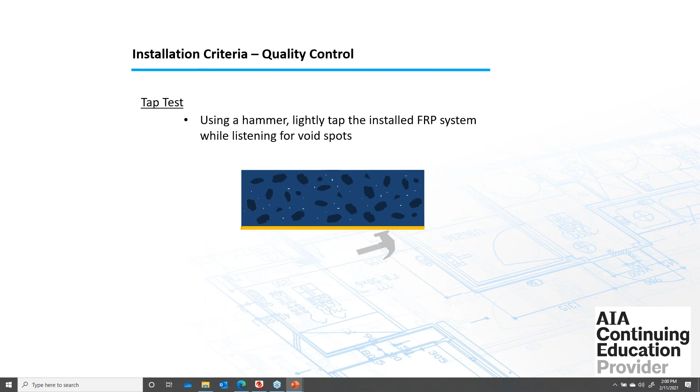To inspect and check the quality of installation, the most common tests are the tap test and the pull-off test. The tap test is quite simple: using a hammer, lightly tap the installed FRP system while listening for void spots. During the training, the manufacturers put a lot of emphasis on avoiding voids for the plates and bubbles for the wraps.

For the pull-off testing, a number of pull-off tests can be completed following application of the FRP system. Using the right tool or machine, a minimum tensile pull-off strength of 200 psi, 1.4 MPa, must be achieved to be considered a successful installation. Failure should occur in the concrete for a pass test.

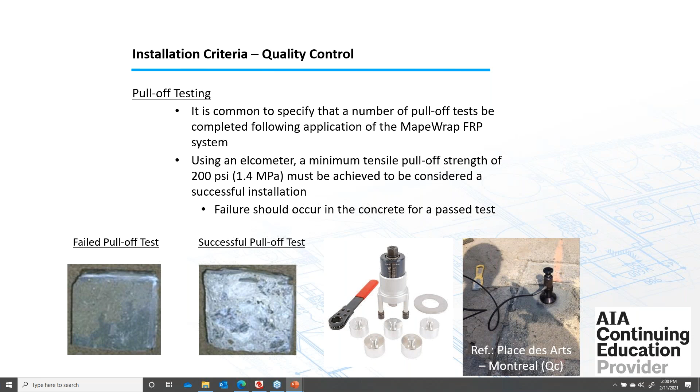In the next two slides, we will see two different projects where pull-off test was used for bond critical applications. In the Champlain Bridge, FRP fabrics were used for shear strengthening. The large amount of fabrics involved in this project obliged the engineers to plan independent and dedicated zones for pull-off tests.

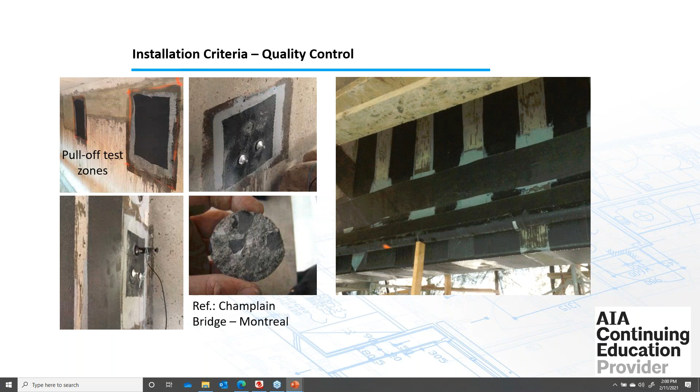In Place des Arts, downtown Montreal, pre-cured CFRP laminates were used for flexural strengthening to increase negative resisting moment. In this case, contractor and engineer agreed on installing extra length of some plates compared to their design length and conducted pull-off tests on them.

Failure always occurred in concrete, and results were between 2.8 MPa and 4 MPa, which is about 580 psi, which is way above the minimum required of 200 psi or 1.4 MPa.

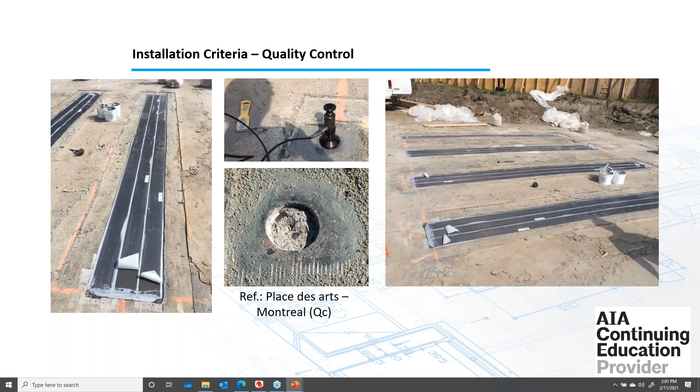Okay, thanks, Hamza. Just in closing, I wanted to introduce some of the guidelines that are available. Here in the U.S., we use the ACI 440.2R. 2017 is the most current version of that. Then there's a whole host of other 440 documents.

Most applicable for most of you from a design standpoint is really just the material specification, the .8-13, but there are documents on FRP pre-stressing, FRP formwork, and all the various tests that need to be run. There's all sorts of documents, but the 2R17 is really the main design guide, and the .8-13 is the material specification.

In Canada, they have the CSA S6 as their bridge code, which does include sections on FRP. Then they have a separate document, the S806, which is the code for buildings specifically for FRP, and I believe in Canada they allow it to be used for new construction as well.

So that document has guidelines for using FRP in new construction and also in repair. They also have the S807, which is their specification for FRP materials. So it's definitely worth your time to grab a copy of those documents if you're going to be doing any kind of FRP design on your own, with your own firms.